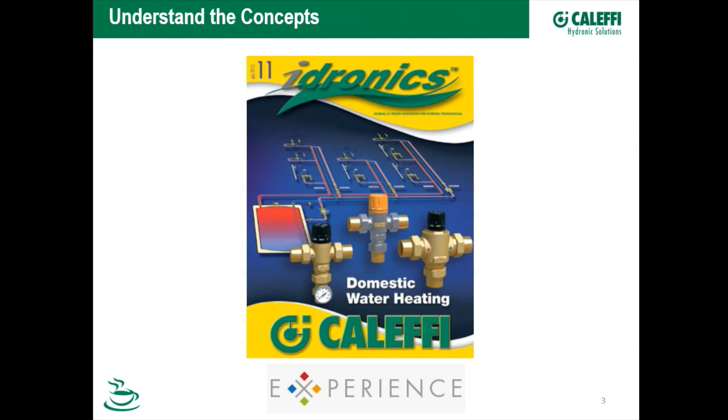Now, let's talk about today's session. What are we going to cover? It's about sizing and it's about generating hot water. So it's about how much hot water does a building need? Balance. I want to produce enough hot water, but if I over-design the system, I end up adding a lot of cost. If I undersize, I risk my customer satisfaction. So I have to figure that out.

So when it comes to doing that sizing, how am I going to do it? Am I going old school with paper and pencil and a lot of cross-referencing to get to a point where I can specify a water heater? Or am I going to use one of the tools that a lot of the manufacturers provide nowadays to achieve that sizing? We're going to look at a lot of these tools. There's some great stuff out there.

And then we're going to look at the water heaters themselves, the pros and cons of the water heaters. We're going to talk about how the energy source plays into this, and about designing for storage and recovery, or just recovery alone. Hopefully I've worked through this in a way that pulls a lot of the manufacturer's bias out of the equation, without throwing a lot of my own personal bias in there.

You may see some of that reflected, but I'm sure we'll talk about that near the end. So the question always comes up, doesn't matter the application, whether it's residential, commercial, a school, a restaurant, a hotel, I have to make sure that I meet the customer's needs with hot water. So how much hot water does a customer need? If I look at my residential customers, the average person needs somewhere between about 20 to 35 gallons of hot water a day. That's for showering, for cleaning, for guys it's for shaving, it's for dishes, it's for laundry.

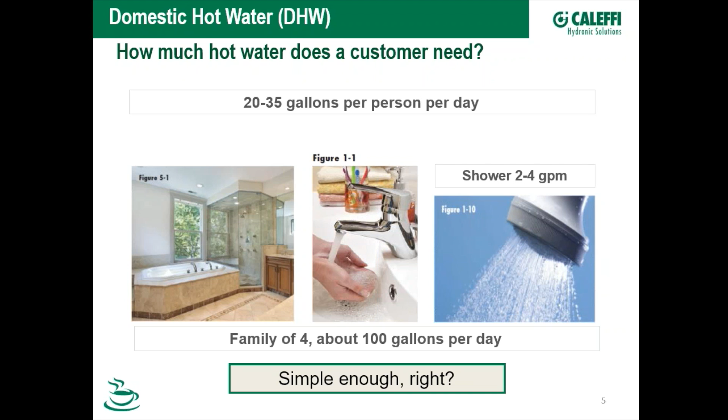But if I'm looking at meeting the needs, that's the amount of water I have to provide. Let's say I'm looking at a family of 4, and I'm going to go for a number somewhere in the middle, let's say 25 gallons a day. For a family of 4 to meet their hot water needs, I need about 100 gallons of hot water. Now, that's not a very daunting number to produce. As I start to think about it, it's like, boy, this should be really simple - the reality of hot water use in a building.

It's not a constant draw 24 hours a day. With hot water demand, there's peaks and valleys. There's going to be peak draw periods in some applications, in particular in residential. There may be stretches of hours where the hot water is not used at all. So when I start to look at it from an aspect of usage, daily knowledge isn't enough.

This happens to be a typical peak and valley chart that came out of idronics 11. The red represents a high morning usage. The blue represents a typical high evening usage. But if you look at those bar graphs, hour to hour, the demand of hot water changes. And from a customer satisfaction standpoint, it's all about meeting the requirements on those peaks. Because if I can take care of the peak, then I should have no problems with the valley when it comes time to size that hot water.

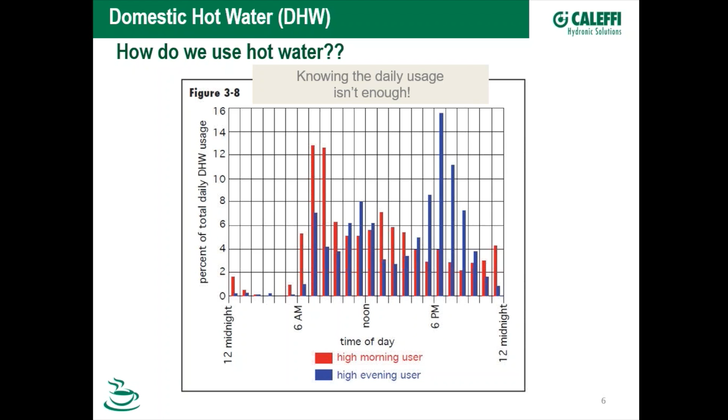So if I'm looking at an application and I know how many times, and I'm going to go on a 1 hour period, that peak 1 hour, that they utilize this hot water, these hot water usages, I can calculate how much hot water at the peak my water heater has to provide.

So for instance, this is also out of idronics 11 as an example. Let's say I have a family of 4, and I'm going to go with, like my family, it's an early morning peak. Let's call that peak between 6 and 7 a.m. in the morning. During that time period, there's going to be 3 showers. The 3 showers are going to utilize 12 gallons of water each, so that's 36 gallons of water.

There's going to be 1 shaving in that period. 1 shaving used 2 gallons, I add that in there. Evidently, the 1 person that doesn't take a shower is going to shampoo their hair. That's another 4 gallons of water. And when it's all said and done, before they leave, I'm going to say somebody does a hand washing of the breakfast dishes. That's another 4 gallons of water. I add that all up, I get 46 gallons first hour or peak rating.

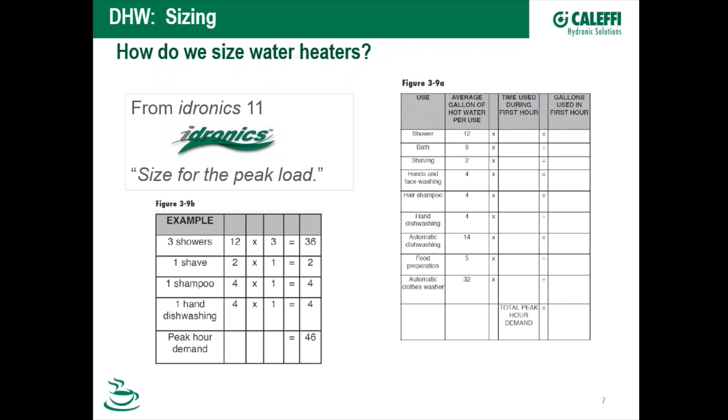Now, the key is I need the data to utilize this chart. What do I do if I don't have specific data, or I'm doing an application that's much larger? Commercially, this is where the Hunter's curve or the modified Hunter's curve comes into play. Now, this method has been around since the 1940s. Hunter, I think it was Roy Hunter, was the engineer that developed it, and it's a way of estimating water usage, both for hot water, for cold water, for drainage.

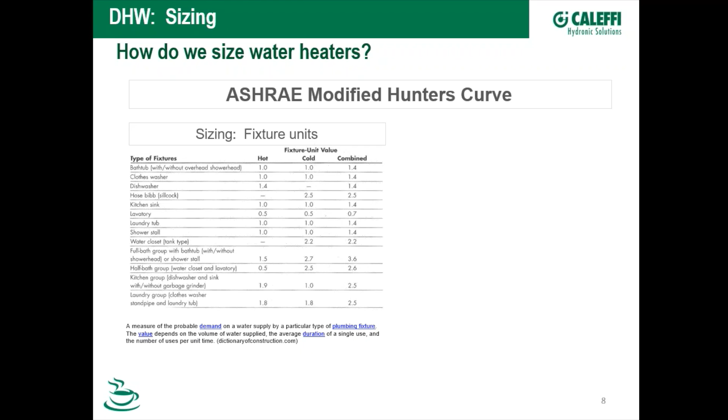A lot of information, but if you look at that table, every fixture for hot, cold, or combined has a value. Since we're sizing water heaters and I'm trying to look at demand on the water heater, let's look at the hot water side of things.

For instance, a bathtub has a fixture unit of 1. A half bath group is a fixture unit of 0.5. So these fixture units allow me to look at all of the equipment in a building that utilizes hot water, assign a fixture unit to each one of those devices, and through this fixture unit I can work my way to a water demand.

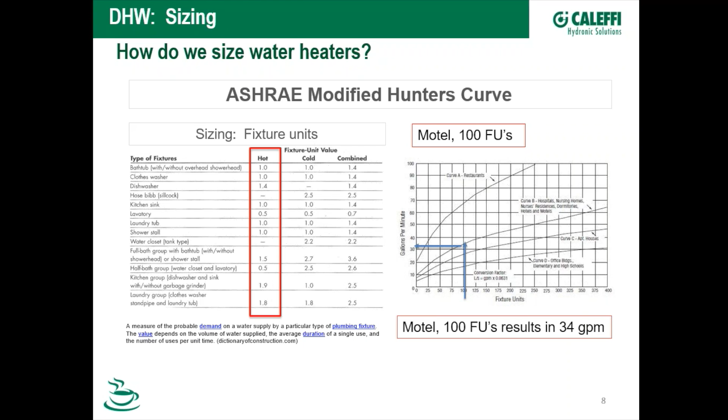So for a motel with 100 fixture units, the resulting demand is going to be 34 gallons per minute. Now, to simplify the process, if I take that 34 gallons per minute and extend it out to an hour, that's telling me I have about 2,000 gallons per hour demand.

From this demand that I get from the modified Hunter's curve, I then have a piece of information that I can use to size my water heater. The thing is, I'm only at about the halfway point, because I still have to look at the water heaters that are going to meet this demand.

So, a preview of where we're going: with commercial water heaters, there's going to be about the continuous draw number. A lot of times there's not a whole lot of data available about usage, or I may want to take a shorter route to get there.

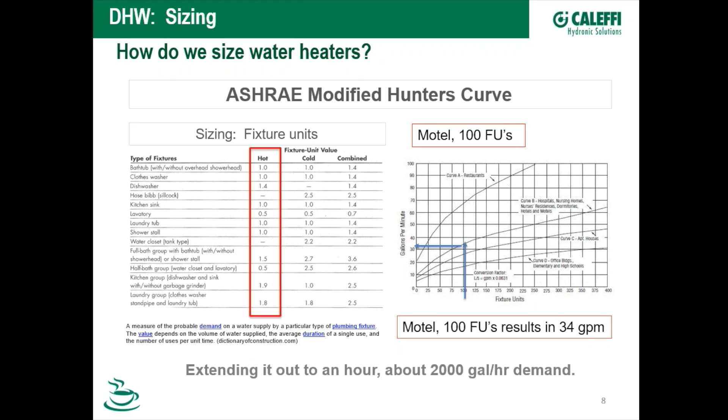Residentially, a lot of manufacturers have charts available. I happen to pull up Amtrol's. I know the chart inside and out, and it's probably one of the charts that have been around in one form or another for the longer period of time. So this is a Boilermate chart, and the Boilermate style of water heater is what's called an indirect fired water heater. It doesn't have its own heat source.

It's coupled with the boiler to give a heat input. That's why for that water heater, if I look at my boiler rating over here, there are various firing rates that are associated with the performance of the water heater.

Now, this chart actually looks at the combination of storage plus recovery to meet the demands of the building. So if I know how many people are in the building and I know what size boiler is attached to it, I can choose a water heater.

For instance, I look at an application: there are 3 residents in the building and they have a 60,000 BTU boiler. This is the intersection of the 60,000 and the 3. I have to do the WHS 60 — a 60-gallon water heater with 60,000 BTUs of input into the water heater.

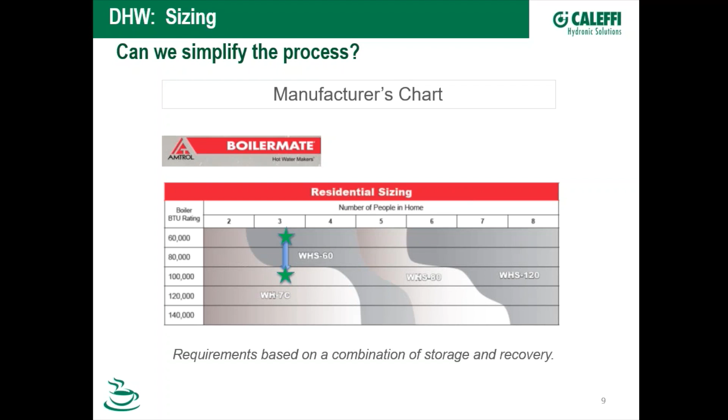Now, I'm going to stick with Amtrol again, because I know a lot of their charts quite well. You can't see most of the information on here — I'll show you a blow-up — but they also have available sizing forms or sheets based on individual types of applications.

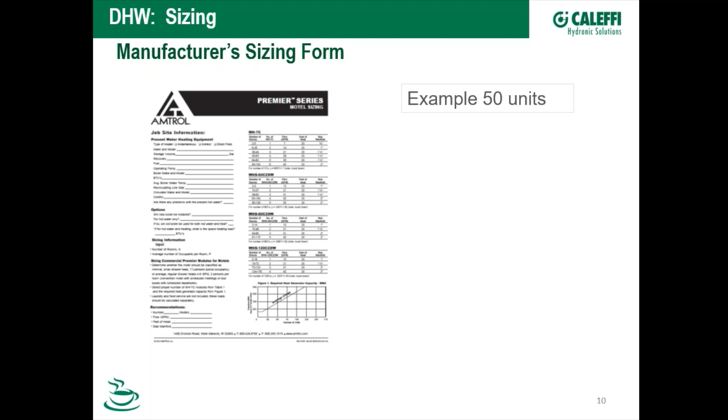This is their Premier Series for motels. I'm going to show you a blow-up of the important information. So for motel or hotel sizing, the key point here is I need to know the number of rooms in the hotel. Let's say, for an example, we are doing a motel that has 50 units. The chart to the left-hand side is utilized to size the water heater or water heaters.

The chart to the right-hand side is about sizing the heating plant to support those water heaters. So for 50 people, there's my column.

I'm going to go with the 120-gallon size tank. It's telling me for a 50-person hotel or motel, I need 2 WHS 120 water heaters. Now, that's half of the solution. The other half is how much heat or energy I have to put into that water heater to generate the hot water.

That's where the chart off to the right comes in. I enter the chart at the 50 unit range, go up to the gray curve because I'm doing a WHS series water heater, and come across and it's about 400,000 BTUs. So to meet the demands for this 50-room motel, I need 2 WHS 120 water heaters, and 400,000 BTUs of energy to support the recovery and demand on the water heater.

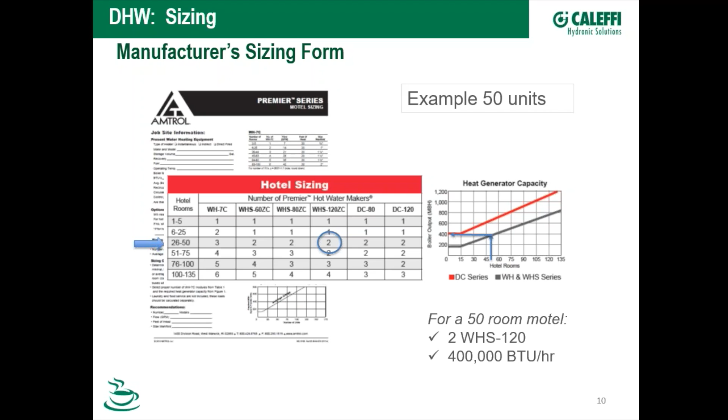This is one that Bob Rohr turned me on to earlier this year, and it's a great representation of an online tool to size for different kinds of applications. This is Lochinvar's LochSpec, and with this LochSpec I can size water heaters.

In the center here, it gives me a wide variety of applications. And over here, it gives me the application details.

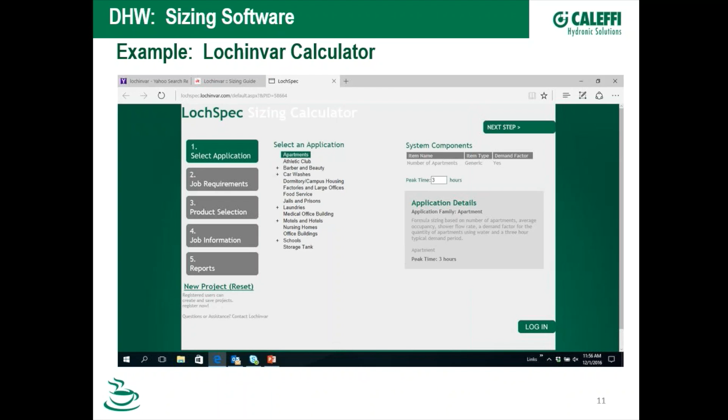Since I spend a lot of time on the road in hotels and motels, I always tend to use motels or hotels as my examples. So I can go in here, select motels, and it will break it down by various styles: business traveler, convention, general occupancy, resort. It gives you a description.

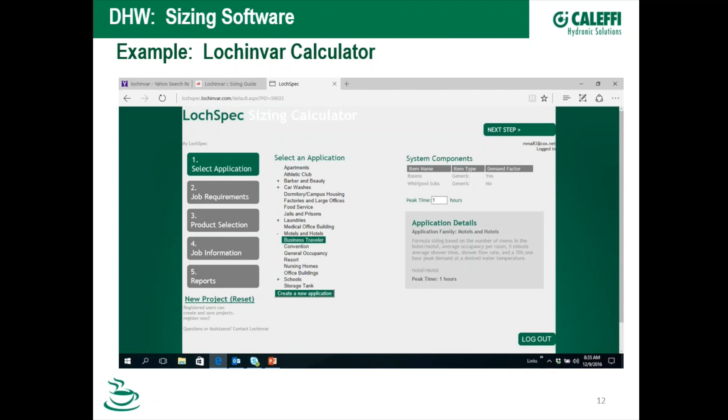It also allows you to select the peak time. For the application I chose, it said we're going to go with a 1 hour peak period. I can change that if my application calls for it.

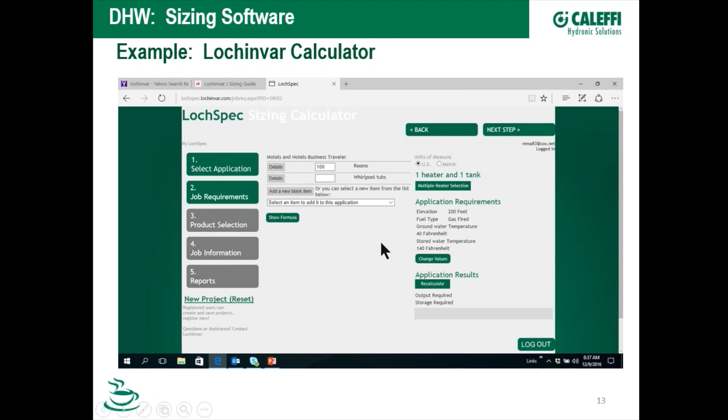Over here's my application requirements: my elevation, my fuel type, my water temperature, groundwater, my temperature stored. I can change values. You notice here it says show formulas, which allows me to see what's going on in the background for all of the calculations if I'm wondering where those numbers are coming from.

So there's a lot of information that can be pulled out of this program as you're working your way through.

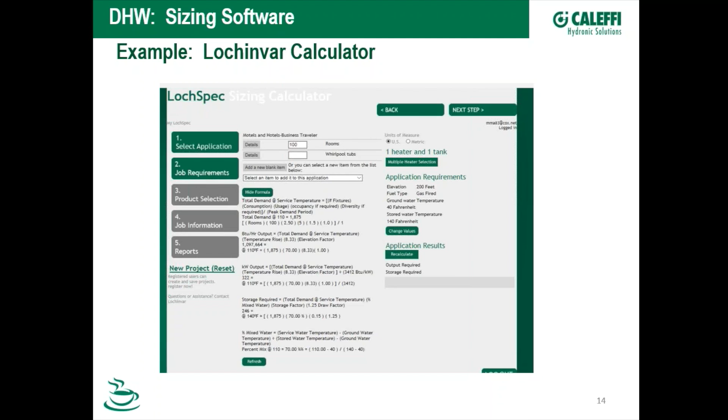It allows me to select models, what am I looking for, and it gives me choices of various water heaters, various tanks, if I'm going to do a volume water heater with a tank or tanks.

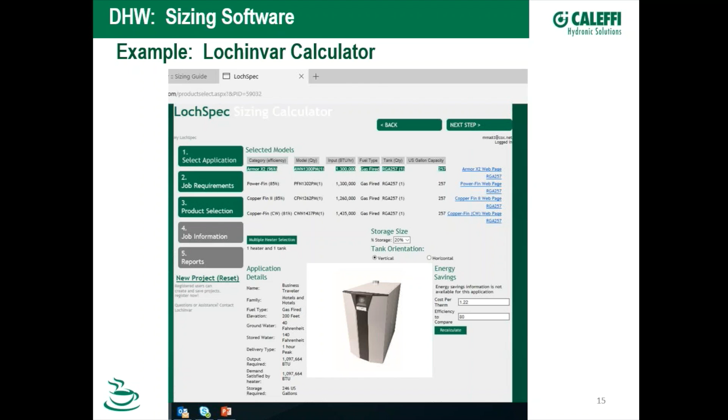I can select my storage size, what percentage of storage I want compared to the load of the system. Then down here is the information for my energy savings, cost per therm, efficiency to compare to, if I'm trying to model and promote a higher efficiency, I also have that information working for me.

And then it gives me a very nice printout. On the top here is the application details, in the middle is my choice, and on the bottom is my savings. I can also print out all of the calculation and background information. So it makes for a nice package to start with a concept and end with a specification for a water heating application.

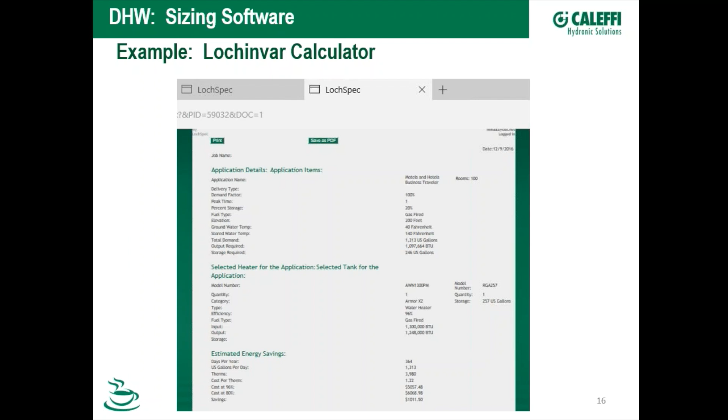Okay, Lochinvar has it, Rheem has it. I've spent some time in here, had been traveling with my rep Mike Zago up in the Michigan area. He turned me onto the Rheem program. It's very robust as well.

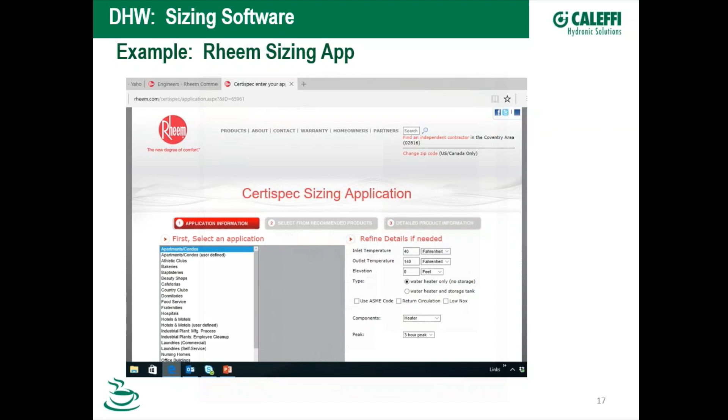A.O. Smith has one, Bradford White has one, and those I just kind of hit on a few of them to give you an idea of what's out there as a resource coming in from the various manufacturers.

With anything else, there's a lot of good manufacturers and reps out there working the various product lines. They can give you a lot more information on this material than I can really cover in a 1 hour period. But these are a lot of different resources to go in there, take a look at the application, and come up with a water heating solution that meets the demands of the system while staying from a budgetary standpoint, not over engineering or making the system possibly more complicated or expensive.

Now, Mark, any pertinent questions yet?

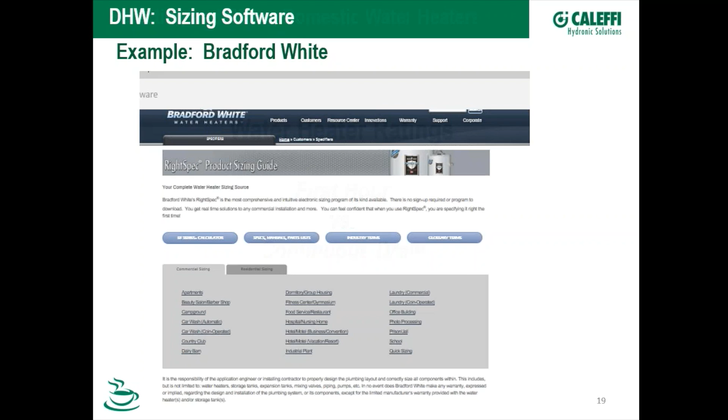So we need to pick a water heater. When we start to look at water heaters, particularly residential water heaters, they're always going to come with two ratings: a first hour rating and a continuous draw. The question always comes up, which one do I choose? What are they? Why are they different? Before we talk about the water heaters themselves, let's talk about the ratings themselves.

I'm going to first start with the continuous draw, because this one shows up on every single water heater, whether it's a residential tank style, an instantaneous, or a commercial water heater. The continuous draw or continuous flow rating shows up everywhere. This number represents the water heater's ability to take the incoming energy and convert it into hot water.

I can actually calculate this continuous flow number from the input, where I take the BTUs per hour, divide it by the delta T, or the difference between the incoming water temperature and the outgoing water temperature, and then divide it also by 8.33. That way, my BTU normally is associated with pounds mass, but I want a reading in gallons per hour.

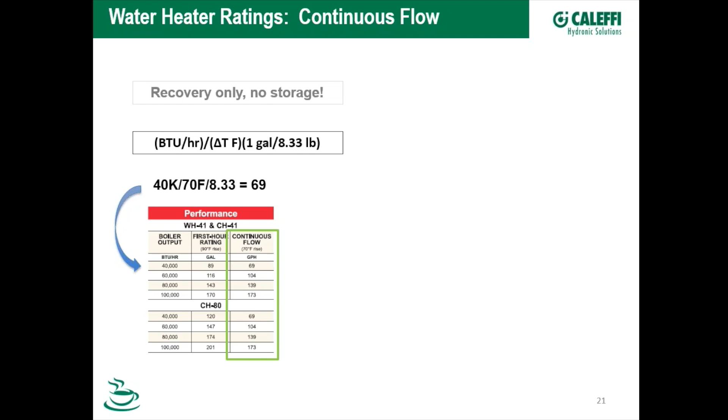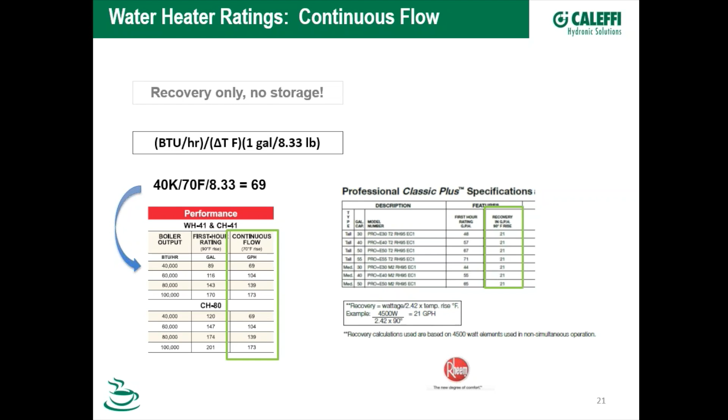So when I look at water heaters, one of the performance numbers shown with the water heater is going to be a continuous flow or continuous recovery number. Now, the other type of water heater rating is what's referred to as the first hour rating. First hour, you'll typically see it associated with residential style water heaters, and they're going to be of the tank variety. The first hour rating reflects both storage and recovery.

Now, how is it run? It's a DOE test. So the test is started with a full tank of hot water. And for the DOE first hour rating test, the tank has to be at an average temperature of 135 degrees. How the test is run...

The water is drawn off at a rate of 3 gallons per minute. And the control point is not based on any sensor in the tank — it's based on the outlet water temperature. So the outlet water temperature is measured, and when the temperature drops 25 degrees Fahrenheit, the draw is discontinued.

At that point, the heat source is turned on and the tank is allowed to recover. When the tank gets back up to temperature, we then start the draw again. Again, if it drops to that 25 degree point, I start the heat source up, and then repeat the process. I continue to repeat that process until 1 hour has elapsed. At the end of the hour, the sum of all the hot water drawn during the course of the hour is added together, and that is the first hour rating.

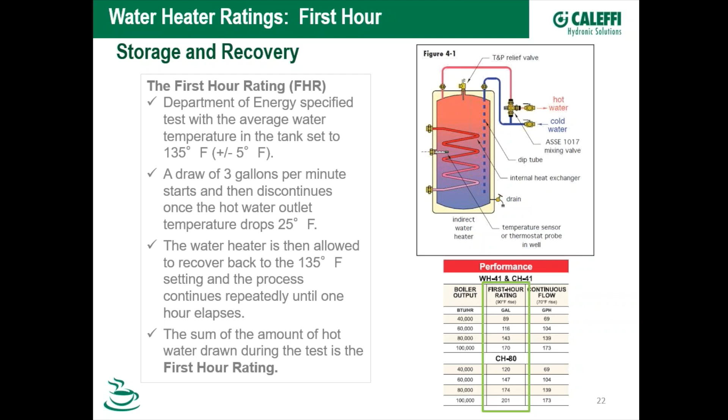40,000 BTUs. With an 80 gallon water heater, 120 gallons. It's storage and it's recovery.

So when I do a residential sizing, this is a piece of information I can use when I'm sizing a storage type water tank for a residential application, because I'm calculating based on a 1 hour peak demand.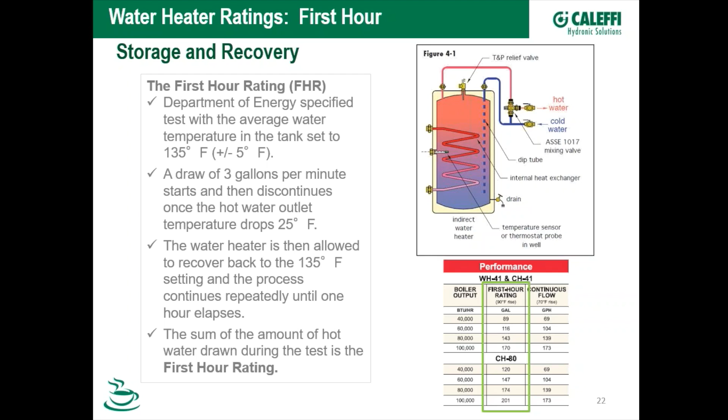Now, when it comes time for water heaters, one of the questions is always about, from the application, am I using an instantaneous or am I using a tank type water heater? We're always interested to find out what people are doing, what people have in their homes.

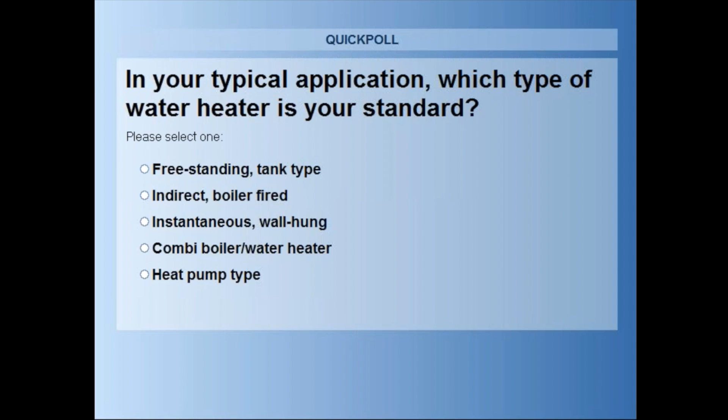It looks like the lion's share, 58%, says freestanding tank type. 24% say indirect boiler fired. 9% say the Combi-boiler water heater. 7% say instantaneous wall hung. And then finally 2% are saying the heat pump type.

Very interesting. Thank you. So we've already voted and we've thrown out a couple of things on there for the water heater selection. So when we start to look at water heaters, there's a lot of ways of dividing up the water heater types. The first division I want to make really is about whether I'm doing a tank or an instantaneous.

Tank style water heaters, when we look at their performance, it's really based on a combination of storage and recovery. There'll be a tank of water to draw against, but there'll also be a heat source in there to recover that tank of water. Now, instantaneous.

An instantaneous water heater really is all about generation. I have no storage in the water heater, and the amount of hot water I can get out of that really is based on the firing rate of that water heater.

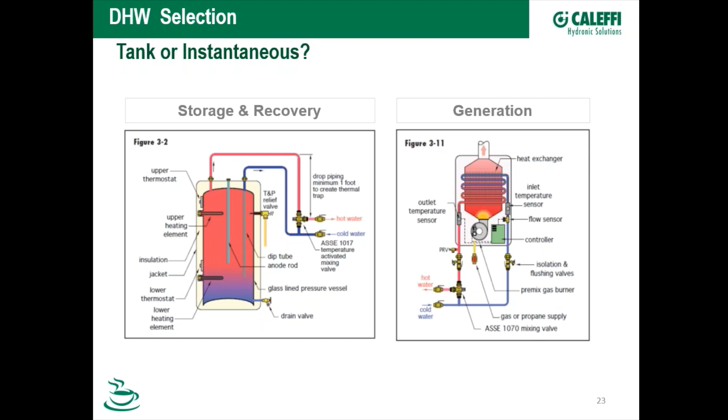So when we start to look at these, we'll take a look through the various versions of each one of these, and then we'll talk a little about the pros and cons of the various styles of water heater coupled with the energy sources.

Now, I kind of like to work from a baseline and work up. So my baseline for discussion today really is the tank style electric water heater.

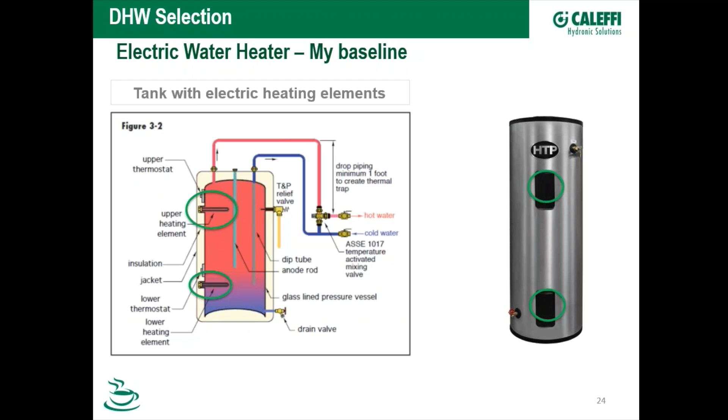Okay, your electric water heater normally will have a high and low element, and as you see here, there are two access plates on the side of the water heater to access the electric elements. And we're using electricity, typical residential 4,500 watts of electricity to heat the water up in those tanks.

Now, about the two elements. Not only do I have two electric elements on the side, but I also have an upper and a lower thermostat to control those elements. It's all about first hour delivery, but also being able to deliver water quickly beyond that first hour.

Because with an electric water heater, with electric element, remembering back to those numbers, 4,500 watts of electricity gives me about 21 gallons per hour of recovery. So it's about, once I've worked my way through the water, about quickly being able to deliver more water.

With the electric water heater, there are two elements, but typically it's an or - I'm going to use only one element at a time. Normally, the bottom element is in use. I want to use the bottom element because I want to recover the entire tank.

Why do I have that second top element? It's sitting there with its own thermostat, also located in the top of the tank. If I start to exhaust the hot water in the tank to the point where the upper element sees a drop in temperature, I want to be able to quickly recover the top portion of that tank, so over a longer period of time I can still provide hot water for other draws that occur beyond that first hour drawdown of the tank.

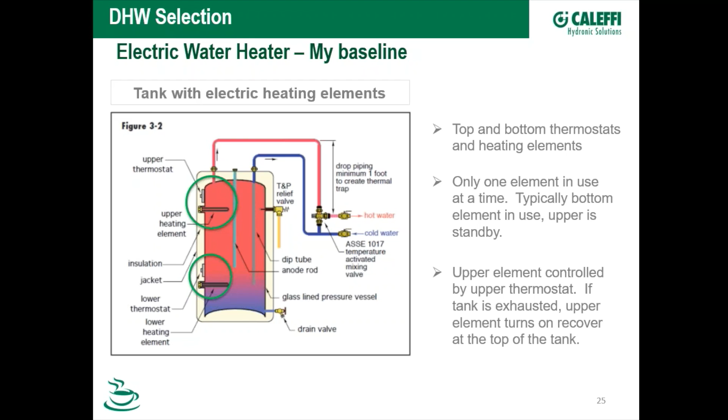Now, because of the nature of being powered by electricity, I pulled up a couple of ratings here for a few of the Rheem electric water heaters. You'll notice here's my first hour ratings, and here's my recovery. This first hour rating is under that first hour test. And if I look at the numbers, particularly the recovery numbers, and start to compare as we go through other methods, you'll notice the electric numbers are lower than other styles of water heaters.

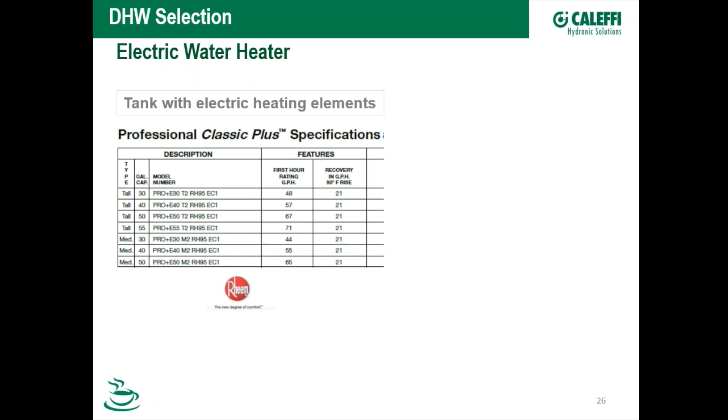So what does this really mean to me? I look at using an electric water heater: what are my pros and cons? Out of the gate, my first instinct was, well, the best thing about an electric water heater is it's electric. The worst thing about an electric water heater, it's electric. Why is it good? It's electric. An electric water heater typically has the lowest upfront cost.

It's also all self-contained. So what I'm really doing is bringing water and bringing electricity to that water heater. There's no burner, I don't have to worry about the burner. I don't have to worry about an open flame or any combustion wherever the water heater is located. Additionally, I don't have to worry about makeup air for the combustion process, and I don't have to worry about a flue to get the combustion products away from the water heater.

This, coupled with the fact that there's no flame, gives me great flexibility in the location of the electric water heater. I've seen electric water heaters in mechanical rooms, I've seen them in bathrooms, I've seen them in kitchens, I've seen small ones under counters. It gives you great flexibility in where I can put it, because it's just about where's the water and can I get electricity to it.

The cons - everything has an upside, everything does have a downside. Because I'm running off of electricity, typically the recovery rates are going to be lower with an electric water heater as compared to the same volume water heater that's being recovered by other methods. Now, because of the lower recovery, typically I see an electric water heater going into an application that's larger than a water heater fired by another method.

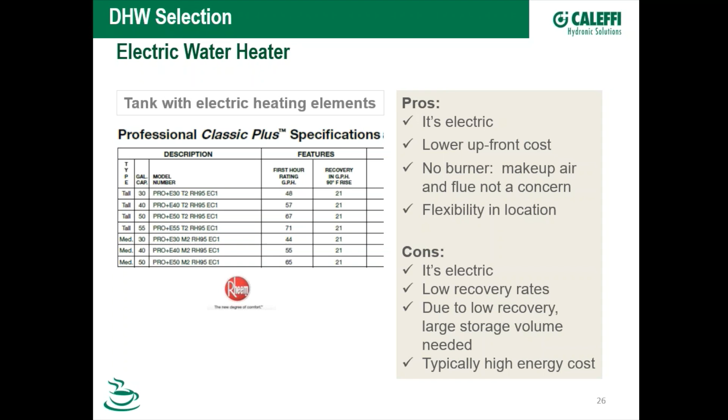However, in a lot, if not most markets, typically from a unit of energy standpoint, you see that electricity is much higher than, I'll use natural gas as a for instance. So the energy needed to deliver the hot water that building requires - a lot of times you may find that your electrical water heating costs are probably your highest cost month in, month out of any method of generating hot water. But it has great application, it certainly has specific places in the market where it does become a very good choice.

Now, this one, I believe on our polls, only got 2% vote for the hybrid water heater. To me, I think it's probably one of the most cool products we have there on the market. And it's a specific version of an electric water heater - it's a combination of a heat pump and electric resistance. So if you look at the picture over here, I still have an electric element here. That's why it's hybrid - it's resistance, but it's also heat pump.

But I have a heat pump sitting on the top of the water heater, drawing air out of the space and extracting heat with that heat pump from the ambient air and allowing it to heat the water in the tank.

Now, a couple of things about this. When I look at a heat pump water heater versus an electric water heater, because of the heat pump component, the initial costs are a lot higher for a heat pump water heater than a straight electric - I should say a hybrid water heater. However, we're finding that many electric utilities, because of the efficiency, there are some pretty decent rebates on the hybrid water heater.

The performance from an efficiency standpoint is outstanding. Depending on the brand and setup, this happens to be Rheem's number, I can get an energy factor up to 3.5. So for every kilowatt of energy I'm utilizing, I'm getting the equivalent of 3.5 kilowatts of energy as heat deposited in the water of my tank. That's an outstanding number, and that's why they're heavily rebated.

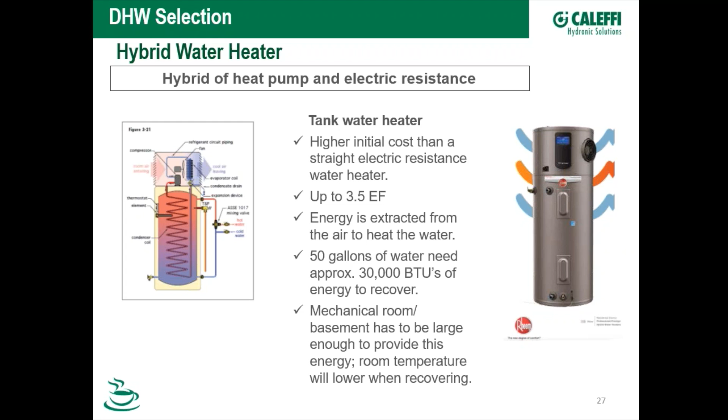Now here are the performance charts for the Rheem unit from the previous screen. If I look at my temperature rise, I'm going to look at my recovery - my recovery now is 29 gallons per hour. Better than straight electric, not quite as good as going to a gas burner, but from a performance standpoint, it's pretty hard to touch the efficiencies you see from a hybrid water heater.

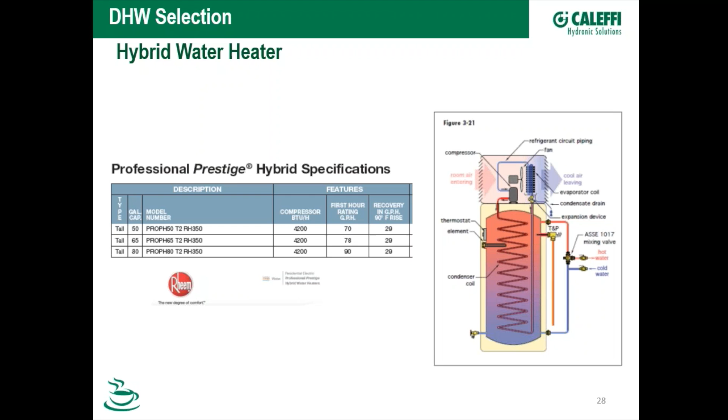Now let's move on to gas. Here's a couple of pictures of various gas-fired water heaters. Here's the cutaway of an atmospheric one, and this does a good job of mimicking what we have over here from Lochinvar. I have a gas burner on the bottom and a central flue. I bring my fuel into the water heater, burn the fuel, and then through the bottom of the water heater and the flue, I'm extracting the energy.

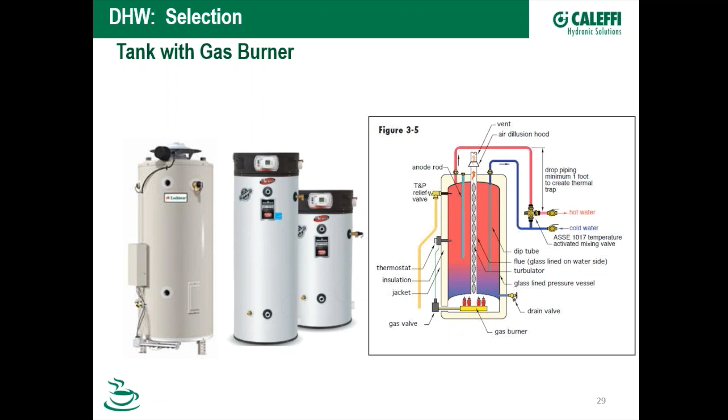With a gas-fired water heater, my recovery numbers are tied to the firing rate, and I can get much more energy into a gas-fired water heater than I can electric. Here's a typical chart: this is a 29-gallon Rheem water heater with a 60,000 BTU burner on the bottom. I get a recovery number of 61 gallons per hour, and from that 29-gallon water heater, a 90-gallon first hour rating. These are really outstanding numbers. So all of a sudden, when I bring that gas burner into the equation, I start to see the performance go up.

Same thing happens on the commercial side. This is a Bradford White chart - this commercial EF series is actually the water heater shown off to the left. I'm looking at a 60-gallon water heater with 125,000 to 199,999 BTUs, and a 100-gallon water heater at roughly 400,000 BTUs. With that kind of energy, I'm looking at first hour ratings at a 100-degree rise of 451 gallons, for continuous recovery on that water, my continuous number. So when I bring that gas burner in, my recovery numbers become much more dramatic, much larger, and I don't have to rely as much on storage.

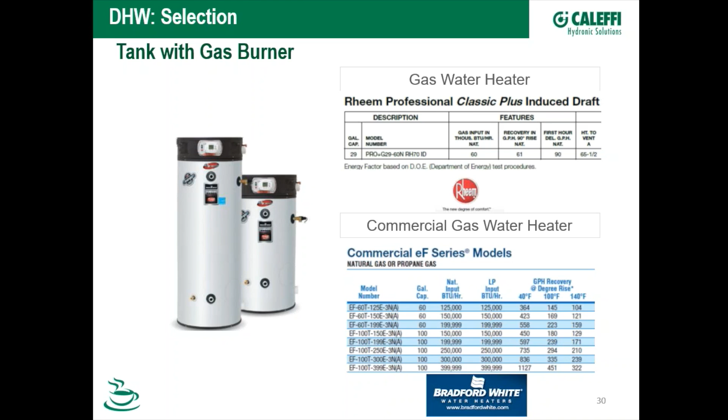So I throw in the gas burner - what does it get me? Well, the pros: I'm still in a self-contained water heater.

In most cases, compared to a few other options, my costs are still fairly low up front. And due to the nature of the gas-fired water heater, I have some much higher recovery rates available.

Now, the other pro is if I'm comparing it to electric, in most markets my energy costs, even though the electric water heater has a higher energy factor, I'm still going to be in a better fuel savings, or a better gallons delivered per energy cost spent, with a gas-fired water heater.

The cons? Well, I'm concerned with makeup air and venting. It's a gas-fired appliance. Additionally, depending on the style, I may have higher flue losses through that flue, and that tends to drive the energy factor down low. Also, when I start to look at what I need for firing it, there's always the need to bring the fuel in. And depending on the style, I have to be concerned about non-combustible floors. There's a lot of things that come into play when I move from electricity to gas.

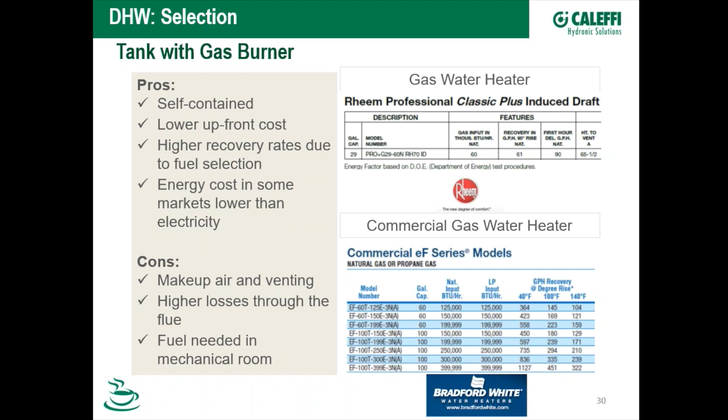The other style of tank-style water heaters is what's referred to as an indirect. I'm showing two models there, the Amtrol Boilermate and the HTP SuperStor. I tend to show those two because I think most guys that got into indirect water heaters 20 years ago, when they really started to hit the market, these were probably the brands that they cut their teeth with.

It's referred to as an indirect. You have a coil in the water heater because the water heater does not contain its own heat source. I have a coil that I'm going to connect up to the water from a boiler, pass that water through the coil, and by passing it through the coil, I'm going to transfer the heat from the boiler into the water heater to heat that water up for use.

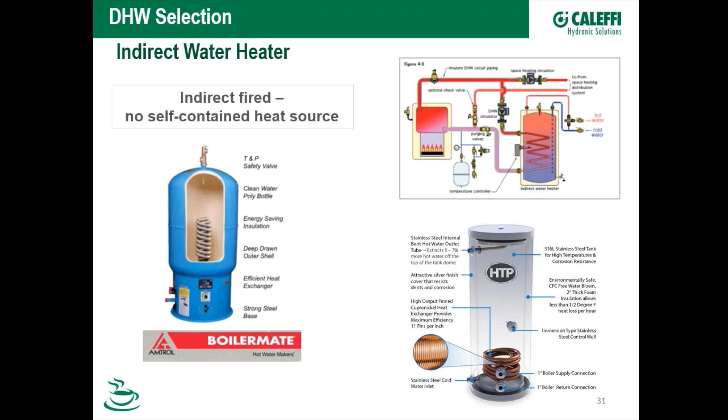Now, when I look at sizing and I look at performance, it's not as easy as, a lot of times, a gas or electric-fired water heater for what I can get out of it. Because that water heater doesn't have any contained heat source, there's a lot of things that recovery is based on.

The first item is really it's based on the boiler firing rate. How much heat is that boiler putting out? This sets the maximum number. Now, just because it is the maximum number doesn't mean that's what I'm going to get. The actual recovery is really tied to two other factors: the flow rate through the heat exchanger and the water temperature flowing through that heat exchanger. So when I look at performance, I have to look at the chart from the manufacturer to make sure I meet all the conditions to get that water heater to recover to my requirements.

Jody, this is Mark. Yes.

Hey, this might be a good time for one of the questions that came in as it relates to indirect hot water heaters. In these situations where you have a building that has both a domestic hot water demand as well as space heating, and recognizing that in the summer typically your boiler is not doing any space heating, what are the main impetuses for a combi boiler, or I should say an indirect hot water heater, versus two standalone units?

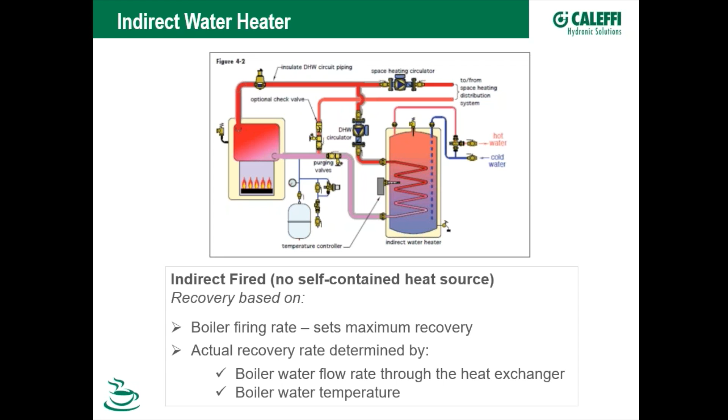Yep. So this is a very specific style of indirect water heater. I'm sure a lot of you have seen the TurboMax, that's the tank on the right-hand side. Standard water heater: normally the domestic water is in the tank and the boiler water is in the coil.

With this, it's reversed. The boiler water is in the tank and the domestic water is in the coil. It's often referred to as an instantaneous indirect. I bring the water through the coil, through that hot tank of water. I am heating the water up as I'm using it, so there's very minimal storage of water in the tank.

Now, its biggest advantage really is the fact that a standard water heater with a coil is depending on natural convection or some movement within the volume of the tank to turn that tank over, because the heating element's in the bottom, the coil in most tanks is in the bottom, so I have to turn the water over to recover the entire tank. On the tank side with the boiler water, I am forcing that movement, and I'm always bringing the hottest water to the top of the tank.

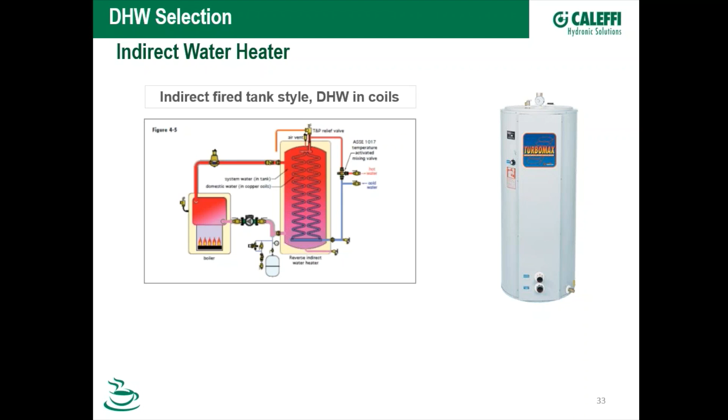So from a performance standpoint, I'm still tied to the firing rate of the boiler, but for certain applications this may be a great option. I'm going to pick it up a little bit and skip through that performance chart.

Okay, now with indirect fired water heaters, my bias shows up because I only found one con. Typically the pluses are that it's usually a high performance water heater based on the boiler selected to couple with the water heater, and this is the boiler sized for heating of the building, the space heating need. The nice thing is most of these boilers have a built-in control, so there's minimal amount of other components needed other than typically the circulator.

to move the water between the boiler and the tank. And it becomes really an integrated appliance, both space heating and domestic hot water. Of course, the one con is it does require a boiler, and I'm sure somebody not biased like me would come up with 2 or 3 others.

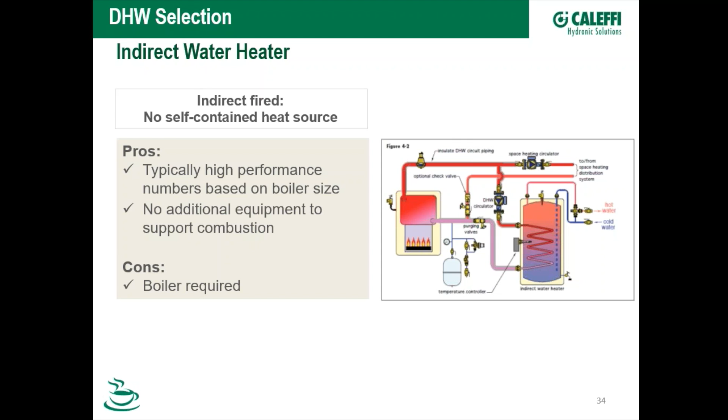Now let's talk about instantaneous. Let's get away from the tanks. So an instantaneous fired water heater, there's a typical one through HTP. With these, whether it's gas or electric, there is no storage. It's all about recovery.

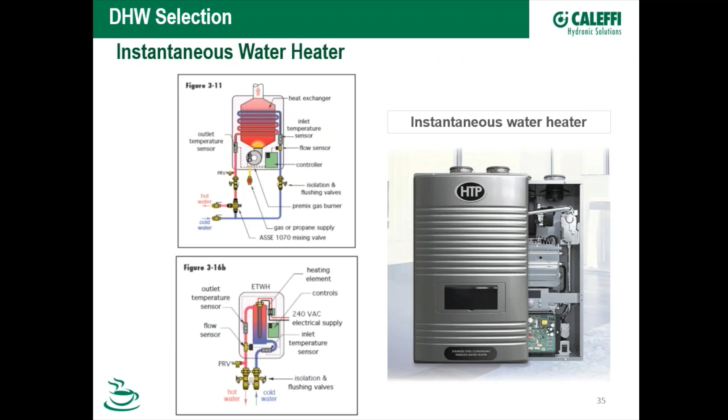So when I look at these and ask how much hot water, it's really about the input. Here's a formula directly out of idronics 11, so I can calculate it if I know the firing rate of the instantaneous unit, the efficiency of the instantaneous unit, and then the delta T, how much I'm trying to heat that water. So here's an example out of there.

So for instance, if I have an instantaneous water heater that's 150,000 BTUs and 90% efficient, and I want to raise the water temperature from 45 to 120 degrees Fahrenheit, I do my calculation and I'm going to get 3.6 gallons per minute. So it's all about firing rate.

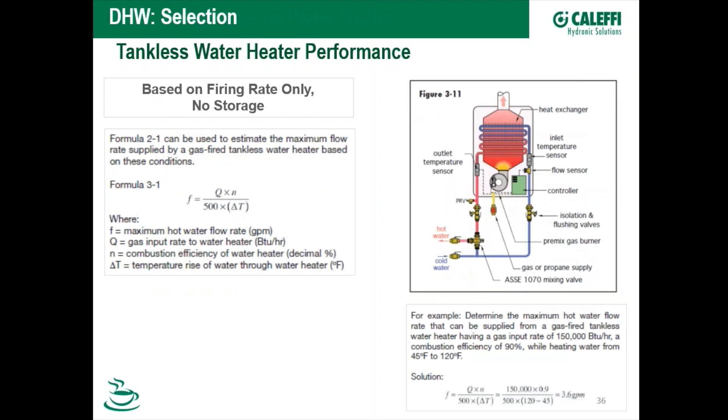What are the advantages? When we look at the numbers, I think tankless was a little lower on the scale of people using it, but again, it's all about application. It has very little standby loss and a small footprint, normally mounted on the wall. So there are applications where this is your absolute best choice.

What are the things that have to be considered? It's all about firing rate. So when I look at higher flow rates, I need a higher firing rate to support it.

The unit fires every time somebody uses hot water. So if somebody goes in the kitchen and opens a faucet to wash their hands, the tankless water heater has to fire. So you can have this thing doing a lot of shorter cycles if there's a lot of periodic water usage, say like in a kitchen on Thanksgiving.

The other thing I hear from people who have utilized the instantaneous or tankless water heater: the process is all started by a flow switch, and there is a minimum flow requirement to fire the unit. So if I open a faucet with just a trickle expecting hot water, I may not meet the requirement for hot water.

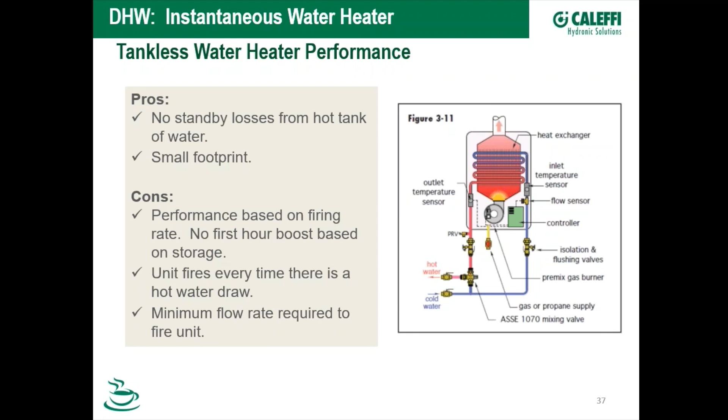Now, commercially, we're going to shift over to a volume water heater coupled with storage. To me this is a really great option when looking at commercial water heating applications. I pulled this out of the Laars NeoTherm manual. Here's my water heater, my volume water heaters—it could be 1, 2, or 4.

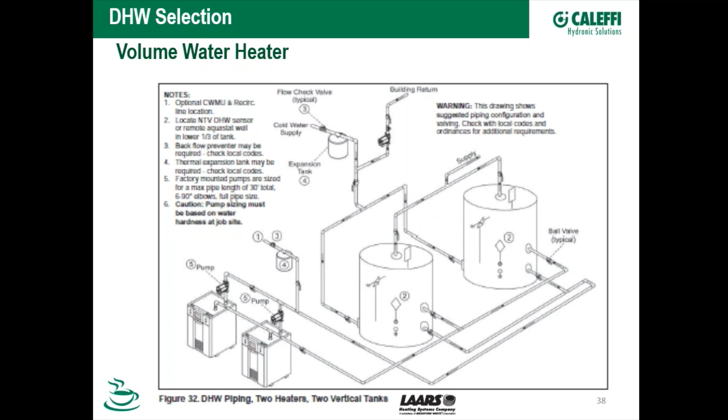Here are my storage tanks—it could be a tank or tanks. It gives me great flexibility in building a system. I can look at what I need for generation and what I need for storage, and couple the best of all worlds together. From a space standpoint, I can put the individual components in the mechanical room where it makes best sense for the layout. For me, it's all about delivery and flexibility.

It provides the ability to match the firing rate with the needed storage for the application. I'm not locked into a water heater and burner being a set combination—it gives me flexibility to meet the draw requirement. I have 2, 3, or 4 water heaters, and I can stage them. A lot of these are modulating, so it gives good adaptability to best meet the needs of the system.

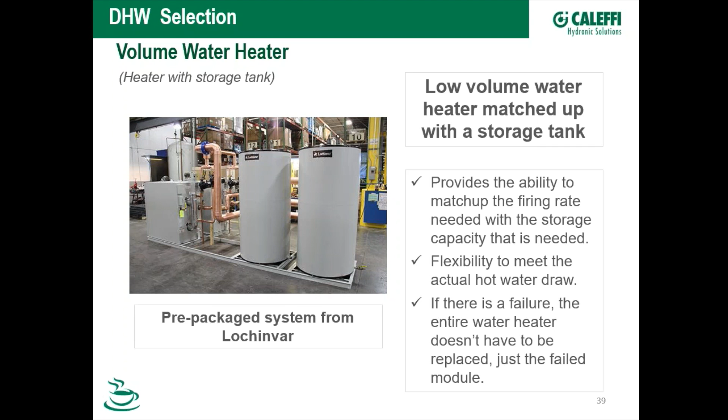And because they're not packaged all in a single unit, if there's a failure I have to deal with, I'm not replacing the entire unit—it's about replacing just the part of the water heating system to meet the needs for water heating.

Now, another specialized version of the instantaneous water heater is the Combi-boiler, and I think those actually got pretty good scores on our survey. I pulled this off of IBC—this is for their DC series. It's a boiler and a water heater in the same package. Most of these packages are wall mounted.

In this red square, coming from here and here on the boiler, that's my space heating system. Coming off here and the two center connections into this small square down here, this is my water heating selection. I was a bit iffy about the mixing valve in their diagram, so for my picture I decided to assist them by throwing in a Caleffi 521 series mixing valve. But it allows me to approach water heating and space heating from a single package.

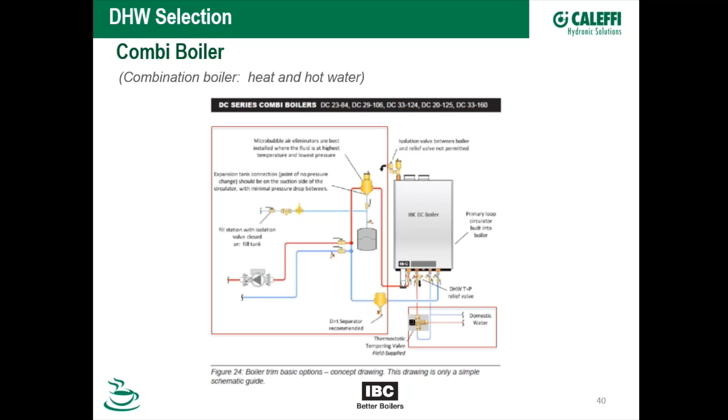What do I have to be concerned with? I do have to be concerned with how much hot water I can get out of these.

Looking across the board at what's out there, there's a lot of these that have a low firing rate. This happens to be from Viessmann's Combi Plus kit that goes with their Vitodens 100. It's very similar to what you see here from our Idronics, but this 26 series is about a 90,000 BTU boiler. With 90,000 BTUs, my continuous number is 156 gallons per hour, a little bit more than 2.5 gallons per minute.

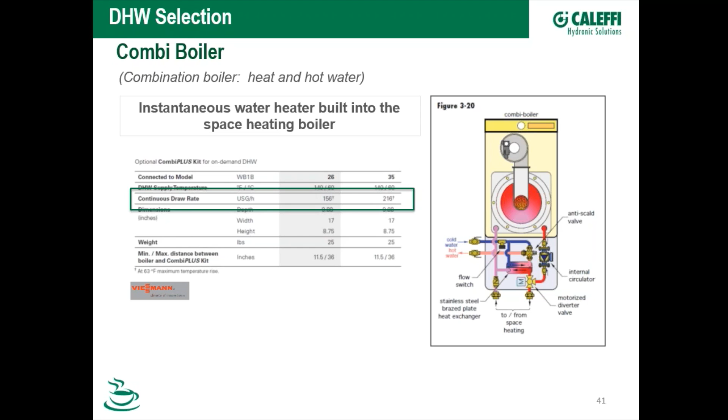So when I look at the application, I have to make sure that when I get it down to a gallon per minute standpoint, it will meet the needs of the application. But from supporting the application, it's great and it's a small package. So I'm doing condos, apartments, townhouses, applications where we're trying to fit everything into a closet—here's my boiler, here's my water heater in one tight package. It gives me a small footprint, and because of the way the hot water is being generated, it may be a heat exchanger integral to the boiler's main heat exchanger, or it may be a brazed plate heat exchanger like you see here in this drawing. I also have very minimal standby losses because I'm not storing a whole lot of water.

On the negative side of things, the performance is based on the firing rate. There is no first hour boost that you normally would see with a storage type water heater because of the tank. So I have to pay attention to my sizing. Just as within a dedicated instantaneous water heater, it fires every time there's a need for hot water, and there is a minimum flow. But for an application where I have to get it all into a small space, the combi boiler is a great option, and it's definitely a segment of the market that's growing.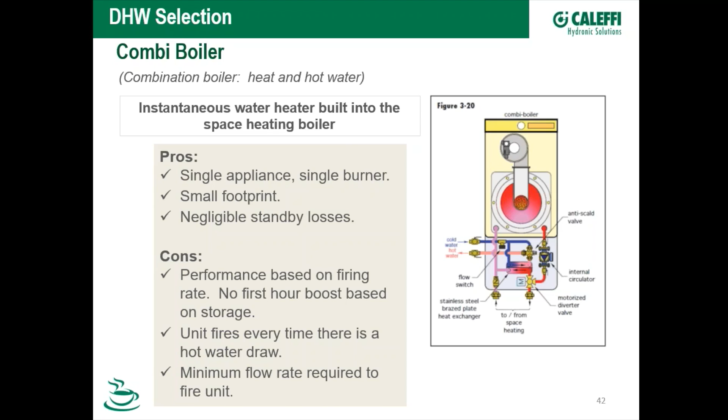Now, kind of to wrap it up before I pass it on to Mark, we need to talk about hardness, and that's one of the things I see as I start to look at various manufacturers' literature. They talk about hardness, they talk about how hard the water can be, and then additionally they talk about how scale resistant their water heater potentially is. So let's talk a little bit about it before we start to wrap this thing up.

Two of the factors are the level of hardness and the amount of daily water usage. These are things that I can't adjust—well, I can adjust the hardness if I soften the water—but these will have an effect on how quickly the buildup happens on the heat exchanger surfaces of my water heaters.

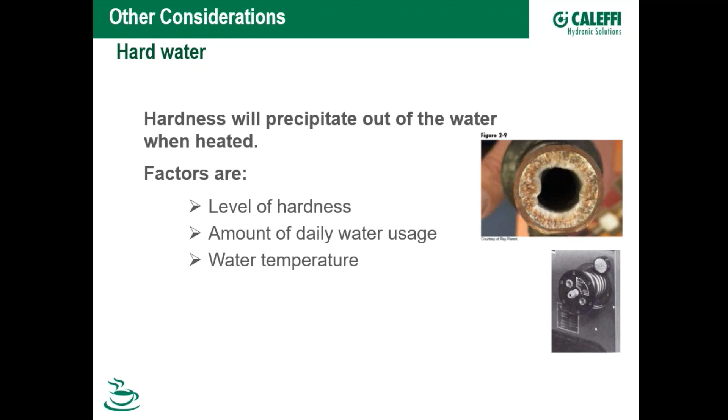Another factor is the water temperature. If I'm heating water to 125 degrees Fahrenheit, the buildup is going to be slower than if I'm heating that water in the tank up to 160 degrees Fahrenheit. The higher the water temperature, the lower the solubility of the calcium bicarbonate, the more is going to come out of solution and problems are going to occur faster. So if I can store cooler, at a lower temperature, I am going to see better performance. Then it becomes about design.

If I can keep my water velocity up—and that tends to look more at your instantaneous style of water heaters—I can reduce the amount of buildup. It's about pushing the flow so it's turbulent. The turbulent flow allows the water essentially to scour the side of the piping, and from my aspect, it's about removing the boundary layers, because in the boundary layer with laminar flow, I tend to have a much higher temperature. I get the velocity up, I scour the boundary layer, my overall surface temperature becomes less, and the buildup is reduced.

The other thing also is if it's a good smooth surface, it will also try and help whatever hardness comes out of solution help keep it from plating on the water heater itself.

And then it's about the surface temperature. The hotter the temperature, the higher the buildup. Okay, so it's about dropping that temperature.

If I have a heat exchanger that has flue gases, combustion gases on one side, running at 1300 degrees versus a lower water temperature, say I'm doing an indirect with 180 degree water, that hotter flame-supported heat exchanger tends to scale up faster.

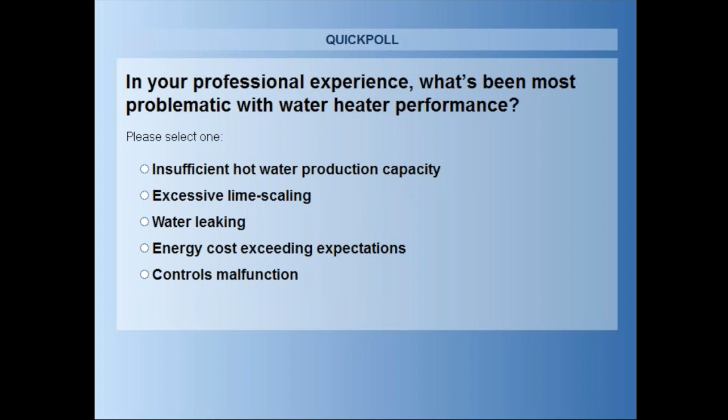In your professional experience, what's been most problematic with water heater performance? We'll share those results. It looks like the winner here is 31% saying insufficient hot water production capacity.

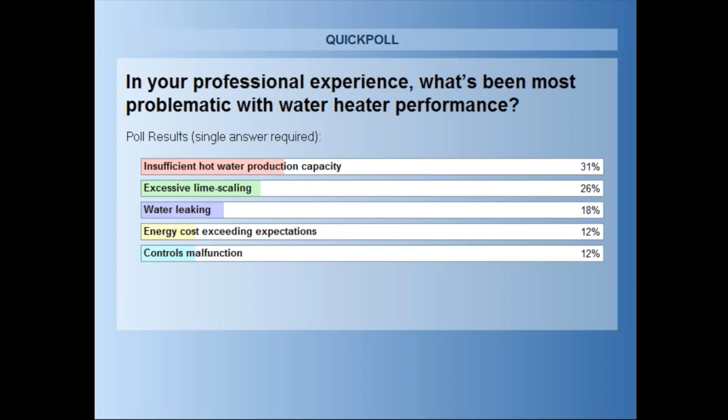26% right behind that is excessive lime scaling. 18% water leaking. And then at the bottom, 12% each for energy cost exceeding expectations and controls malfunction.

Oh, that's very interesting. I thought it would actually be leaking that would have been the number one.

All right, so kind of wrap it up. I'm going to come back to my first slide. So when we started this discussion, we talked a little bit about how much water the building needs, and it led into the methods of water heater sizing.

We looked at a couple of ways of doing it old school, the paper size method.

By the way, a little side note: the Hunter's curve method of sizing water heaters is under examination because it has been around since 1940, and I know a couple of groups are looking at updating it to better reflect what we have now for fixtures and usage in this current day.

And again, we looked at a lot of them, looked at one in depth, and then scanned across a couple other manufacturers' websites. A lot of great resources out there for sizing water heaters.

Then we made our way through the different water heaters, talked about the storage water heaters that give us a combination of storage and recovery, talked about the instantaneous units, and kind of contrasted them as we made our way through.

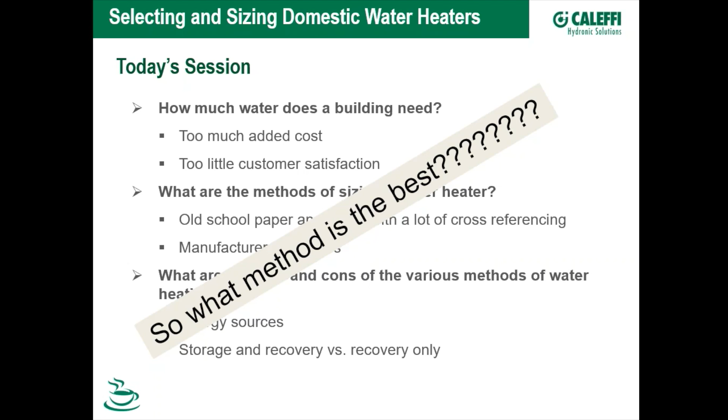I'm going to leave this up here, and this is something that will be debated probably till the end of time. So what is the best method to heat water? We all have our opinions, and from our earlier discussions, we all have our preferences.

Jody, how about two more questions? Is that okay? Oh, absolutely, I got nowhere to go.

There are some questions concerning the differences between peak time and first hour. For example, you showed one of the manufacturers, I think it might have been Lochinvar, that has an online sizing program indicating that more than one hour could be chosen as your peak hours. The first question is, it's assumed that if it's two or three, those would be consecutive hours. Is that true? And secondly, how do you determine peak and what does it mean?

Well, to the first point, typically when you look at the website where you can choose different amounts of hours, when you start to look at applications, for instance, a business traveler hotel is probably going to have a one hour peak. But if I look at a resort hotel, it's not like the people at my hotel last night in Milwaukee, Wisconsin, where it's zero degrees outside and there's not a whole lot of tourists moving around. They're pretty much there for business. They're up, showered, they eat, they're out the door. So you end up with a very short, very concise peak.